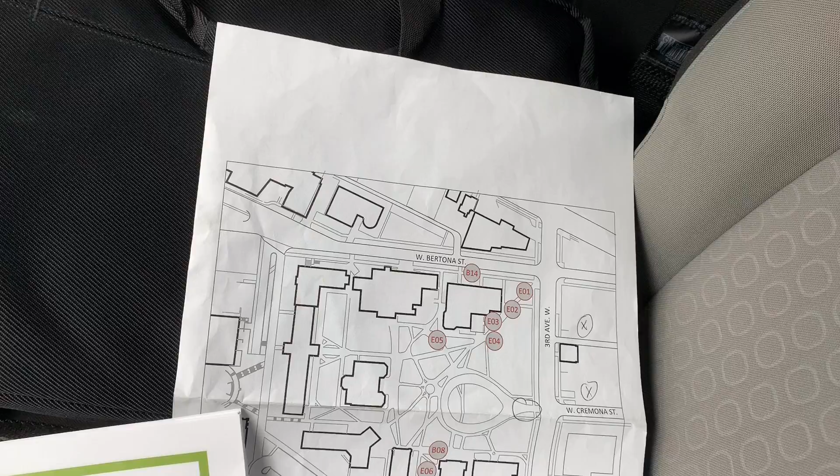Okay, I'm out at Seattle Pacific University. This was a referral from John Mansfield, Coast Property Management. He used to work for SPU and got me in touch with Russ Howard.

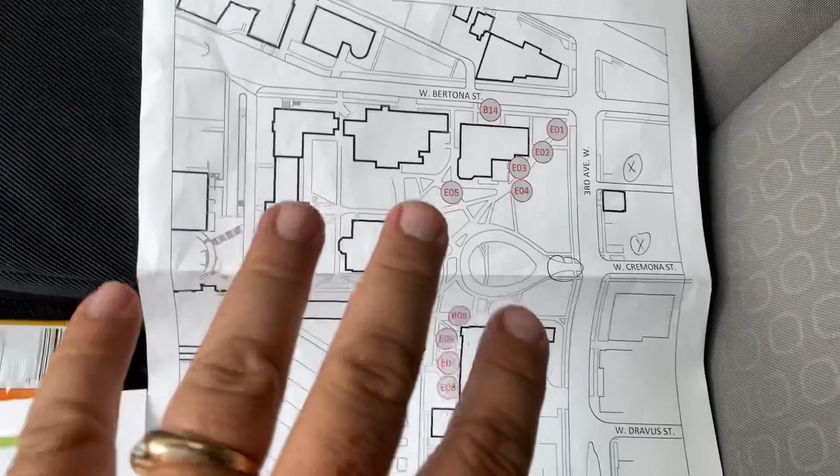So we're looking at a few different projects out here for the summer, but one in particular is concrete sidewalk repair. For project managers, this is on the West Seattle side of Seattle, off of 3rd Avenue West, and it's actually Bertona Street, right up here. Across the street for staging on the concrete, that's going to be our best place for any additional parking, over on the outside here, I guess on the east side.

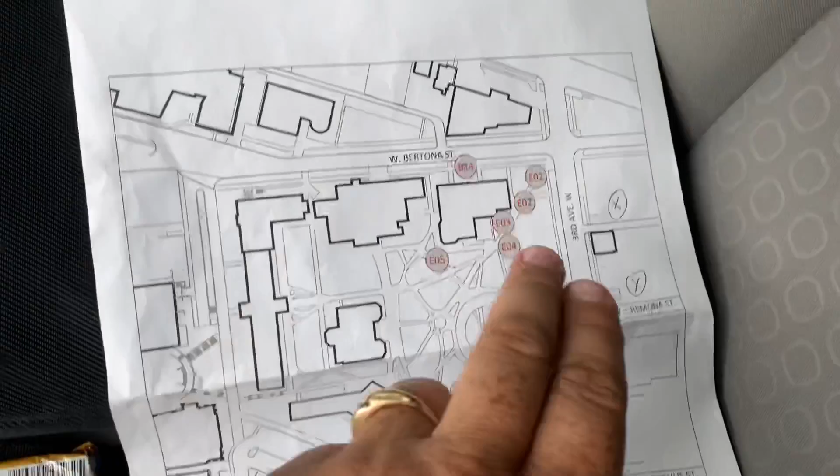So right there, I'm parked right here right now. This little area before the loop is an area we could park a dump truck if we want to, but we want to try to stay off this area because it's stamped and colored, and I don't want to jack any of this up.

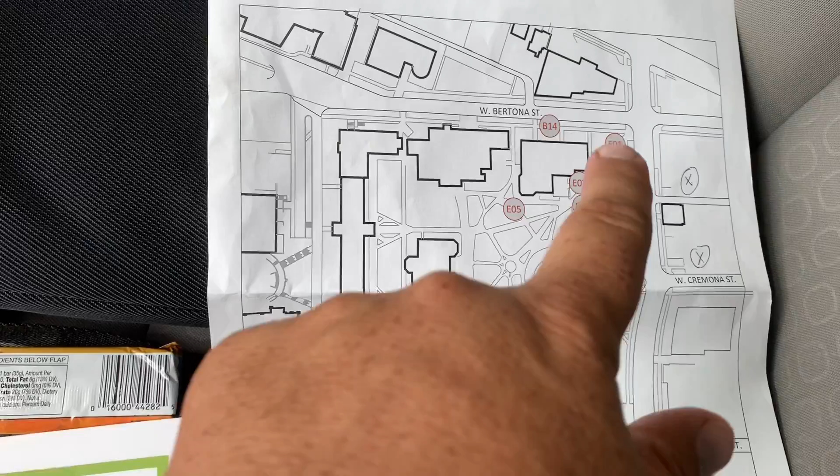So we have to pretty much stop right here, run mechanical wheelbarrows over to do these sidewalk repairs, as well as what's over here. For dump truck excavation, for the Bobcat or the Mini X, we could kind of use the sidewalk to go down.

The restoration we will not be responsible for. They said they will take care of the restoration. So as much as possible, we probably want to try to stay on the sidewalks to get over to where we need to when hauling out excess concrete.

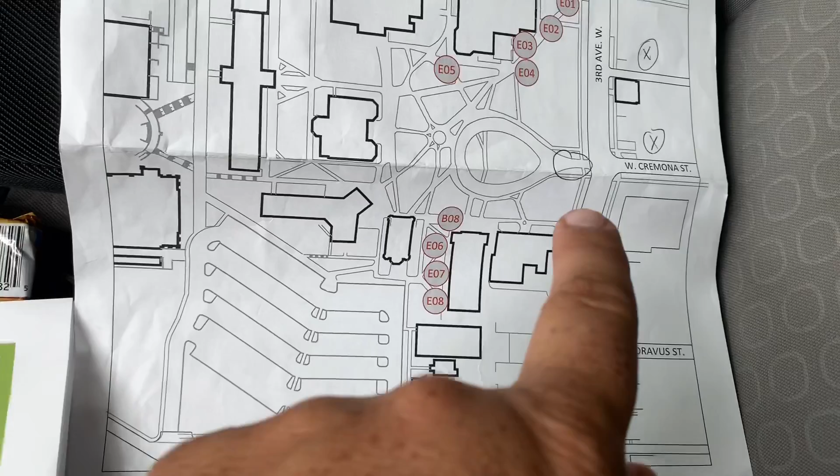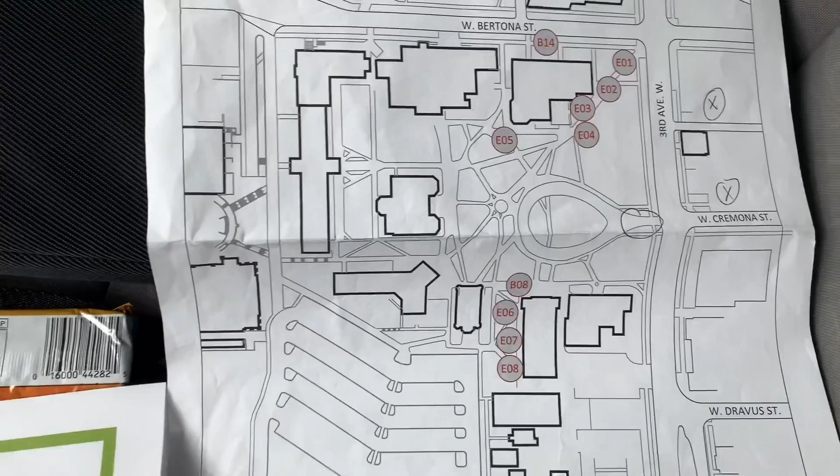Right here, there's also parallel parking that we could utilize. We're trying to avoid getting a street use permit because there's no way we'll get it back in time before school starts. He's hoping to get this done before August 20th, I think. September 20th is when they start school, so there's a chance we could work into early September as well.

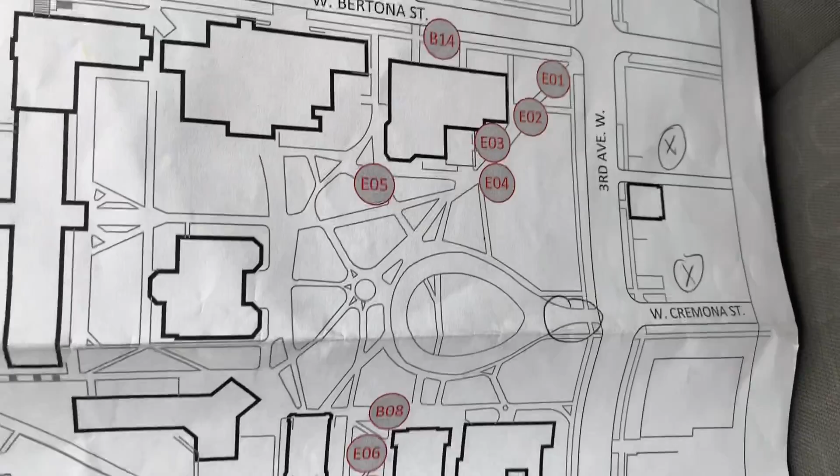You'll see there's these numbers, E1 through E8, and then you've got B08 and B14. These are the only patches of sidewalk, all exposed aggregate, I believe. I'm going to go through and show you each one of these. All of this will be in Workman's dashboard.

That E01 is basically this E01 right here, a 5 by 38. E02 is a 5 by 12. E3 is a 28 foot by 6 foot, and then a little 3 by 3 in the corner here. E4 is a 30 by 5. E5 is 15 by 6.

E6, you've got 5 foot by 43 foot, and then you've got 7 foot by 10 for this area. E7 is 16 by 5. E8, you've got 18 by 5.

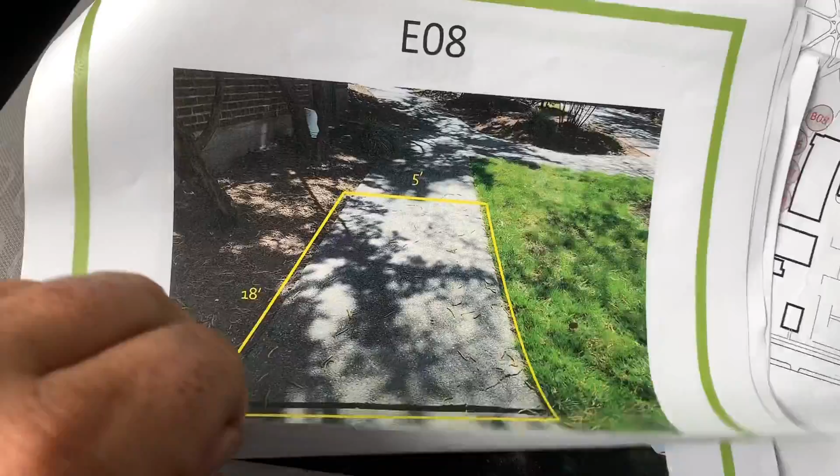If you'll notice, it's a lot of tree root damage. They do have a tree arborist, so we don't have to deal with that kind of stuff. They've already dealt with that issue and those concerns themselves, so we don't have to worry about it.

So I think we looked at B14 and B8. I just want to make sure. Yes. Okay, now I'm going to go out and show you what it looks like.

So here's my thought as we're working on these sidewalk repairs. This is where E1 starts. Down there's that circular drive with the stamped concrete. That guy's standing right where we can have a dump truck.

I'm thinking as we are ripping some of this stuff out, we could probably have our trucks close by right here, and we can just load it up right here, move our truck as we go, but have somebody stationed in the dump truck to take the concrete that we remove.

So you've got E1 right here, right by this tree. Okay, then you've got E2, which I believe is right here.

E2 by the door here where it says Seattle Pacific. You've got that right there. Here's your patch there, okay.